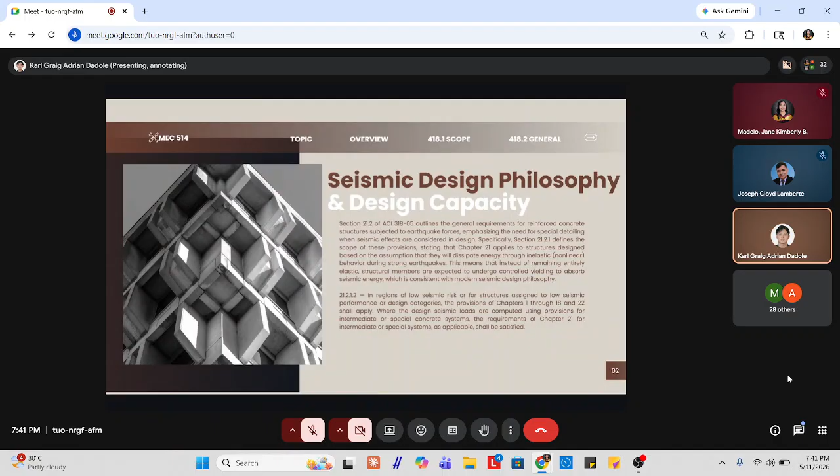In regions of moderate seismic risk, the code requires the use of more reliable lateral force resisting systems, such as intermediate or special moment frames and various types of structural walls, to ensure adequate performance under earthquake loading.

For regions with high seismic risk, the code becomes more stringent, requiring the use of special moment frames, special structural walls, and properly detailed diaphragms and trusses that comply with the detailed provisions of Chapter 21. These systems are specifically designed to provide high ductility, strength, and energy dissipation capacity.

Additionally, structural members that are not intended to resist earthquake forces must still meet certain minimum requirements to ensure that they do not fail in a brittle manner during seismic events.

And lastly, the code allows alternative systems that do not strictly follow Chapter 21. These are special provisions, as long as they provide sufficient experimental and analytical evidence that demonstrates that such a system can achieve equal or greater strength and toughness compared to conventional reinforced concrete systems designed in accordance with the code.

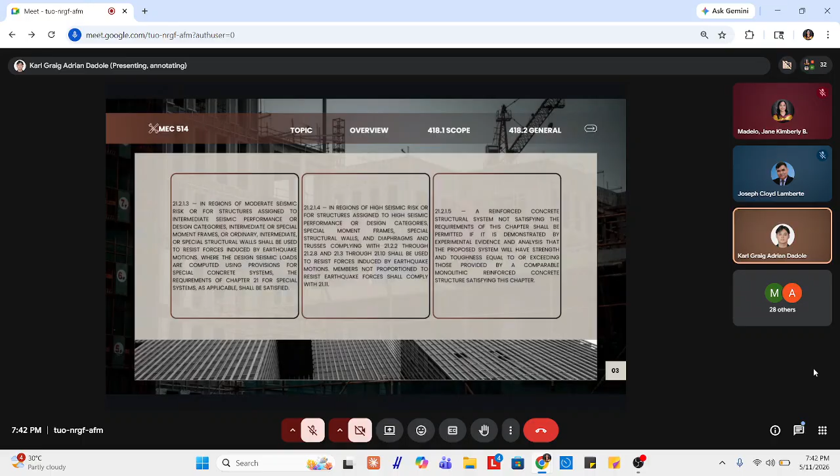For the analysis and proportioning of structural members, Section 418.2 of the Seismic Design Provisions, consistent with the philosophy of ACI 318-05 and similar codes adopted in national standards, provides detailed requirements for the analysis, proportioning, and detailing of reinforced concrete members subjected to earthquake forces. Each of these subsections emphasizes and ensures that structures behave predictably and ductile during seismic events.

For Section 418.2.2, the analysis requires that both structural and non-structural components of the building be considered, as their interaction can significantly influence the building's response under earthquake loading. This includes both linear elastic and non-linear inelastic behavior, recognizing that the real structure will undergo cracking and yielding.

Even members not intended to resist seismic forces, if they produce rigid elements, must be accounted for in the analysis if they affect overall stiffness and response. However, the code clarifies that the consequences of failure of non-seismic members need not be considered in the main seismic resistance design.

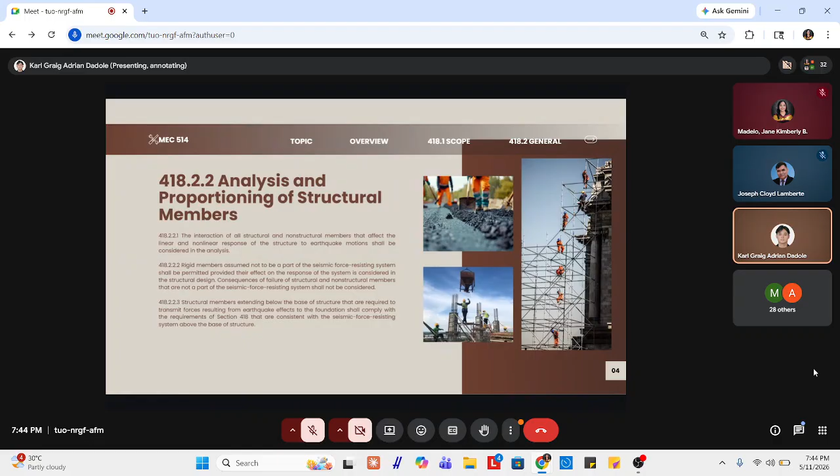Additionally, elements extending below the base, such as foundation members, must be designed consistently with the seismic systems above to ensure the proper transfer of earthquake forces into the ground.

So for earthquake resistant structures, first are the anchoring to concrete provisions, and the strength reduction factors that we need to consider in our design if we use these special seismic provisions.

For Section 418.2.3, anchoring to concrete addresses the anchorage systems that resist earthquake-induced forces. In higher seismic zones, such as Zone 2 and Zone 4, anchorage must meet stricter provisions, referencing Section 417.2.3 of our seismic design code. This is to prevent brittle failure, like pull-outs or concrete breakouts, and ensures that connections between structural and non-structural components remain intact during strong shaking.

For Section 418.2.4, strength reduction factors, this specifies that the strength reduction factors, or phi factors, used in design must comply with Section 421 on strength reduction factors. These factors account for uncertainties in material strength, construction quality, and loadings, and are especially important in seismic design to ensure a margin of safety against failure.

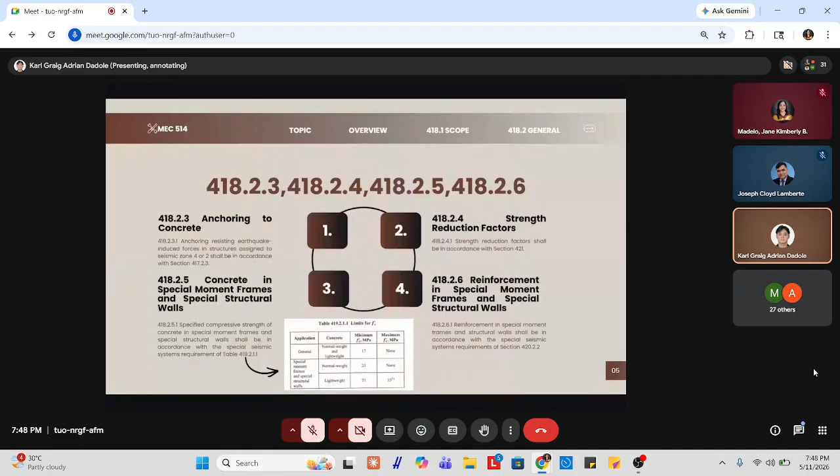For Section 418.2.7, mechanical splices in special moment frames and special structural walls. This section classifies splices into Type 1 and Type 2.

Type 1 splices meet basic strength requirements but are limited in where they can be placed. They are not allowed in regions where yielding is expected, particularly near column-beam joints, because they may not sustain large inelastic deformations. Type 2 splices, on the other hand, are stronger and capable of developing the full tensile strength of the reinforcing bar, making them suitable for use even in critical regions, except where specifically restricted. This distinction ensures that connections in high-stress zones remain reliable during earthquakes.

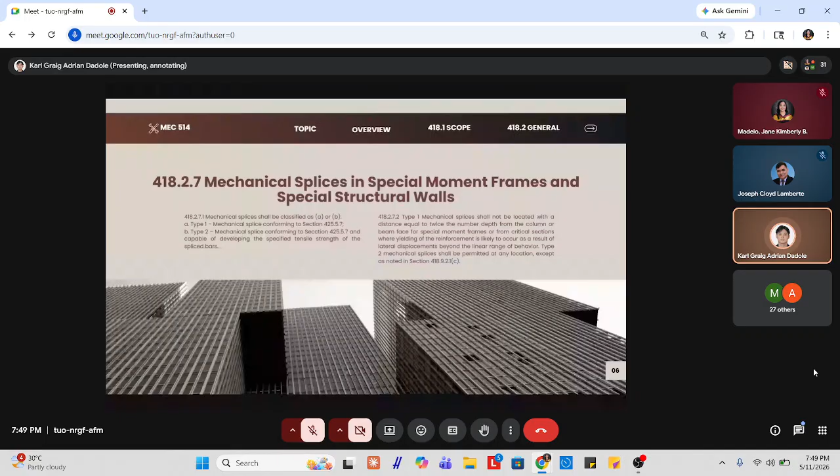For the last slide, welded splice in special moment frames and special structural walls requires that welded splices also meet strength and performance criteria, and prohibits their placement in regions where significant inelastic deformation is expected. Welding can introduce brittleness or residual stresses, so it is carefully controlled.

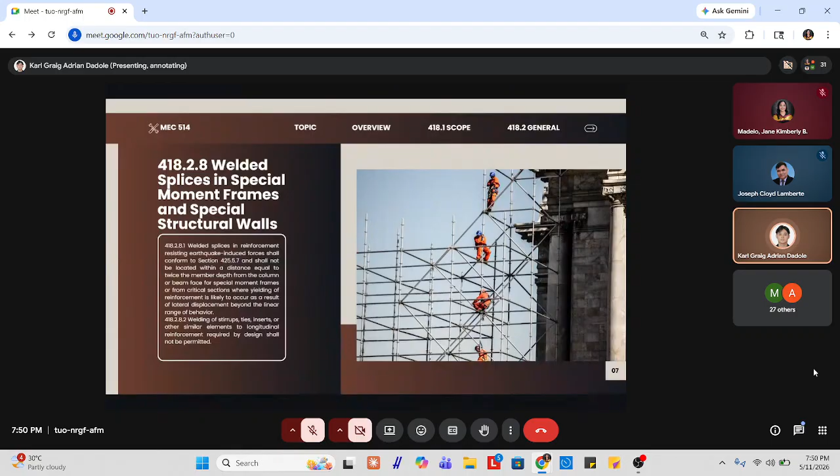Overall, these provisions collectively ensure that the reinforcement in our concrete structures is not only strong but also ductile, with careful detailing, connections, and materials that enable them to withstand earthquake forces through controlled energy dissipation rather than sudden brittle failures. That's all for my report, since this is only the introduction. More in-depth and detailed discussion will be presented later by the succeeding reporters.

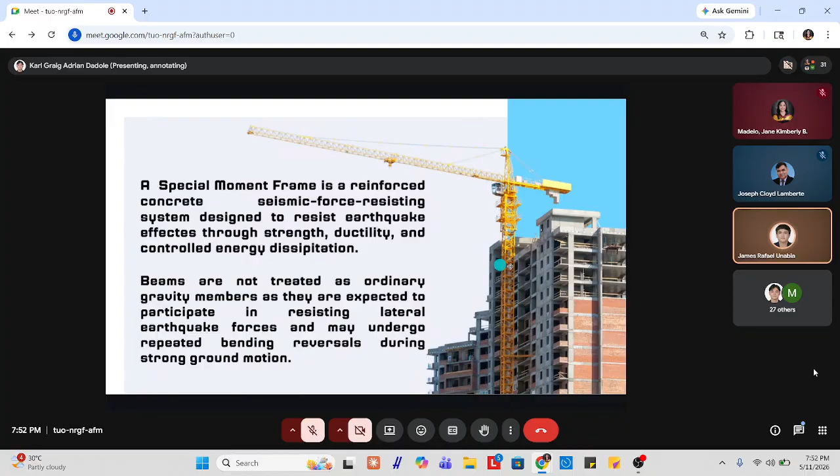Now let's discuss the beam scope, under section 418.6.1 of our NSCP 2015, which applies to beams in special moment frames that are part of the SMRF system and designed for flexure and shear. Dimensional limits, under section 418.6.2, control clear span, width-to-depth proportion, minimum width, and beam projection beyond the supporting column.

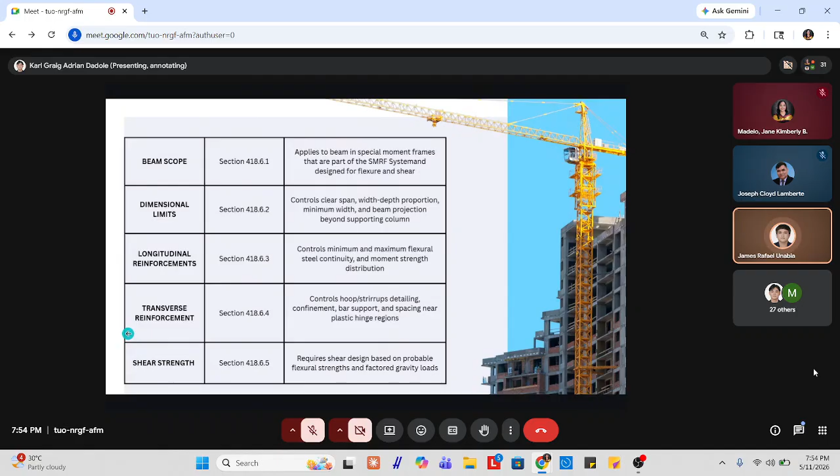Longitudinal reinforcement, under section 418.6.3, controls the minimum and maximum flexural steel, continuity, and moment strength distribution. Next is transverse reinforcement, under section 418.6.4, which controls hooks, stirrups, detailing, confinement, bar support, and spacing near plastic hinge regions. Lastly, shear strength, under section 418.6.5, requires shear design based on probable flexural strengths and factored gravity loads.

So, beams of special frames: the following requirements apply to beams of special moment frames that form part of the seismic force resisting system and are proportioned primarily to resist flexure and shear.

The limits on span length and section dimension are as follows. First, the clear span shall be at least 4 times the effective depth. Its purpose is to prevent deep beam behavior and encourage flexural action. Looking at the seismic reasoning, ductile flexural yielding is preferred over brittle shear-dominated responses.

Number two is the width-to-depth ratio shall be at least 0.3. The purpose of this is to ensure the beam is wide enough relative to its depth. For seismic reasoning, it reduces congestion and allows proper placement of bars, hooks, and concrete.

Third, the minimum width shall be 200 millimeters. This provides constructability and sufficient reinforcement space. For seismic reasoning, it supports proper confinement and prevents weak zones caused by poor concrete consolidation.

And lastly, the projection of the beam beyond the width of the supporting column on each side shall not exceed the lesser of column 2, or 0.75 of the column 1 length. So here's a figure to show on the next slide, which is this.

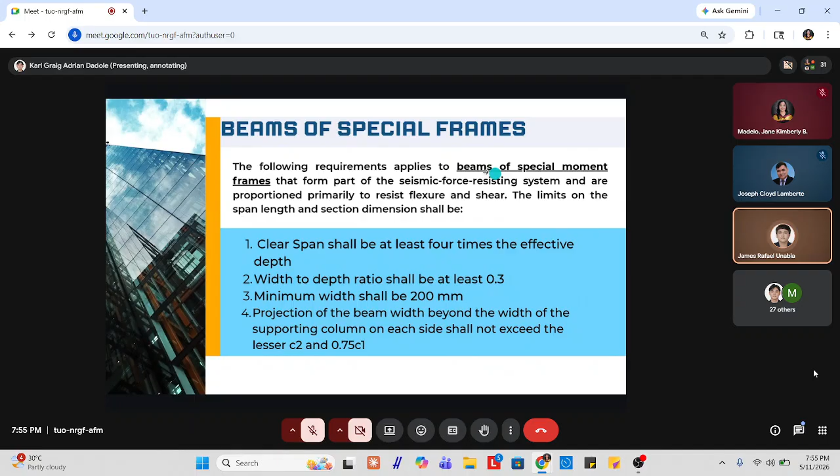This clear span limit is important because if the beam is too short relative to its depth, diagonal compression and shear effects may control the behavior.

So in special moment frames, shear failure is not desirable because it is sudden with only a small amount of warning visible in the beam. By enforcing the clear span requirement, the code supports the formation of flexural plastic hinges instead of brittle diagonal failures.

The width requirement is also related to construction quality. SMRF beams usually contain several top and bottom bars, hoops, seismic hooks, and adequate concrete cover. If the beam is too narrow, bars become congested, then concrete may not flow properly, and it becomes prone to honeycombing.

In seismic design, even small construction defects can reduce confinement and bar anchorage. So we can see in the side elevation of the beam where L should be greater than or equal to 4 times the effective depth. In section A-A, we can see that the beam width shall be greater than or equal to 250 millimeters.

Excuse me, Engineer James. Sir, 200 millimeters, sir. Yes, 200. Okay, mali pala kong figure, sir.

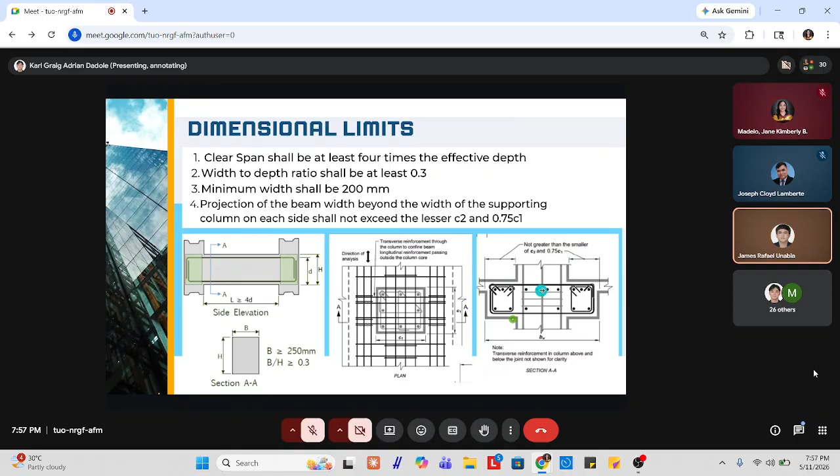So to proceed, we have the longitudinal reinforcement. The longitudinal reinforcement is the main flexural steel that we place along the length of our beam. In special moment frame, this longitudinal reinforcement must be provided both at the top and bottom faces because earthquake forces reverse direction.

The beam must therefore have enough both positive and negative moment capacity near the joints or along the span. So the minimum reinforcement to provide, both at the top and bottom faces of the beam, shall be 2 bars or satisfy these conditions.

First, the area of steel, A sub s, should be greater than or equal to the minimum, which is the square root of f'c all over 4 times fy, times the width of the beam times the effective depth. Or equal to 1.4 all over fy times beam width times the effective depth. Or our required value from our analysis, whichever of these two applies.

Then the maximum reinforcement to provide, both at the top and bottom faces of the beam, shall be less than As equal to 0.025 times the width of the beam times the effective depth. This maximum reinforcement limit is a ductility requirement because if too much steel is placed in the beam, the concrete compression zone may crush before the tension steel yields.

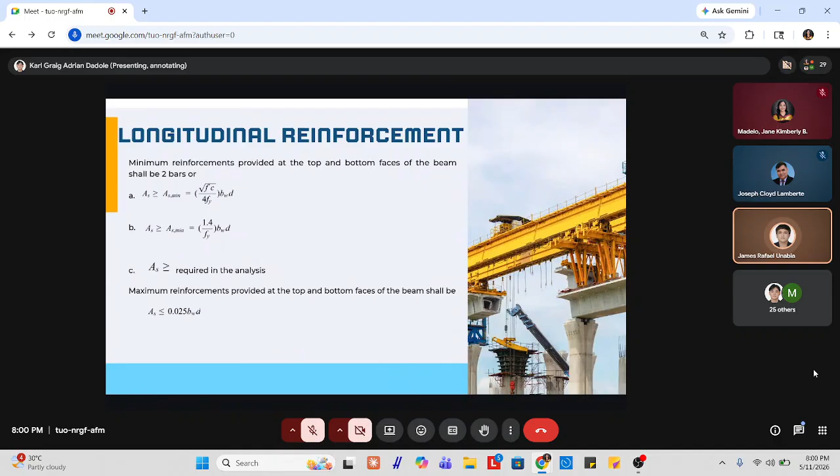This brittle failure mechanism is not acceptable in seismic design. A properly designed special moment frame beam should allow yielding of the reinforcement and controlled plastic hinge rotation.

The positive and negative moment strength requirements also prevent one-sided strength. The positive moment strength at the joint face shall be at least 1/2 the negative moment strength provided at that face of the joint or support.

Then, both the negative and positive moment strength at any section along the member length shall be at least one-fourth the maximum moment strength provided at the face of either joint.

Note that the As minimum need not be satisfied if the As supplied is one-third greater than the As required. So in our illustration, we can see here that the area of steel for the top bars should be either of the following: greater than or equal to the value required from our analysis.

Equivalent to 2 bars, as before, 1.4 over fy times Bw times the effective depth, or the square root of f'c all over 4 times fy times Bwd. And the top bars shall be less than or equal to 0.025 Bwd as the maximum requirement.

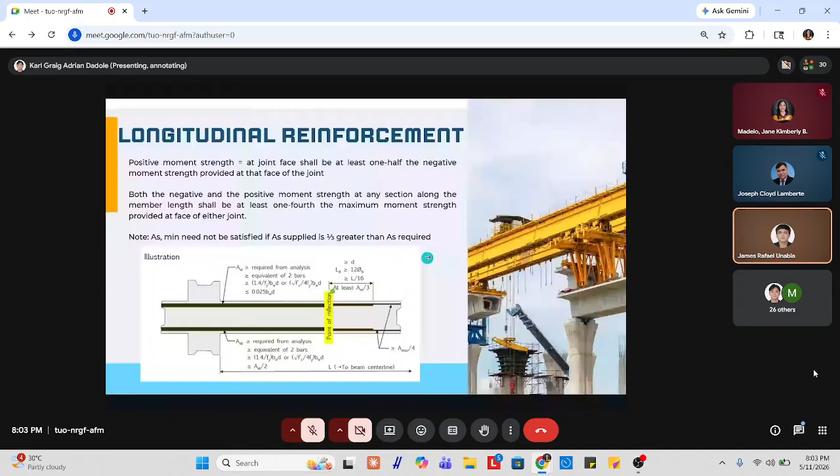Proceeding to lap splices. Splices at the longitudinal bar shall be permitted if hoop or spiral reinforcement is provided over the lap length. The following rules apply to lap splices: first, no splices are allowed within the joints.

No splices are allowed within 2 times the height, or 2h, from the face of the joint. No splices are allowed within 2h from points of flexural yielding as a result of lateral displacement, and the lap length must be provided with hoops or spiral with S equal to D over 4 or 100 millimeters.

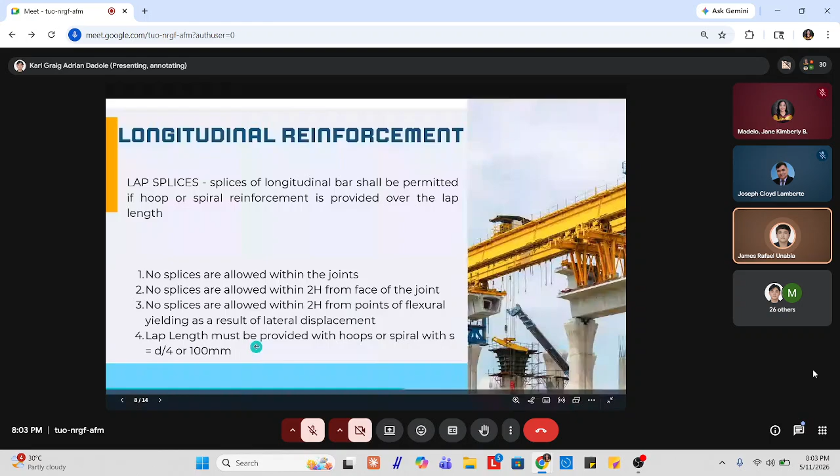Proceeding to transverse reinforcement, this includes hoops, stirrups, ties, and seismic hooks placed along the beam section. In ordinary beams, the stirrup mainly resists shear, whereas in special moment frame beams, transverse reinforcement has additional seismic function.

It confines the concrete core, restrains longitudinal bars against buckling, maintains shear strength after cracking, and supports ductile plastic hinge behavior. Beam ends near column faces are critical because plastic hinges are expected to form during strong earthquakes. In those regions, the concrete cover may crack and the longitudinal bars may yield. Without closely spaced hoops, the concrete core may lose confinement and the bars may buckle under cyclic compression, causing rapid loss of strength and stiffness.

Transverse reinforcement over the confined region shall be proportioned to resist shear, assuming VC is equal to 0 when both of the following conditions occur: first, 1/2 of V sub E should be less than or equal to the probable moment at A plus probable moment at B, all over length. And the condition that the axial load PU shall be less than or equal to 0.05 times FC prime times the gross area.

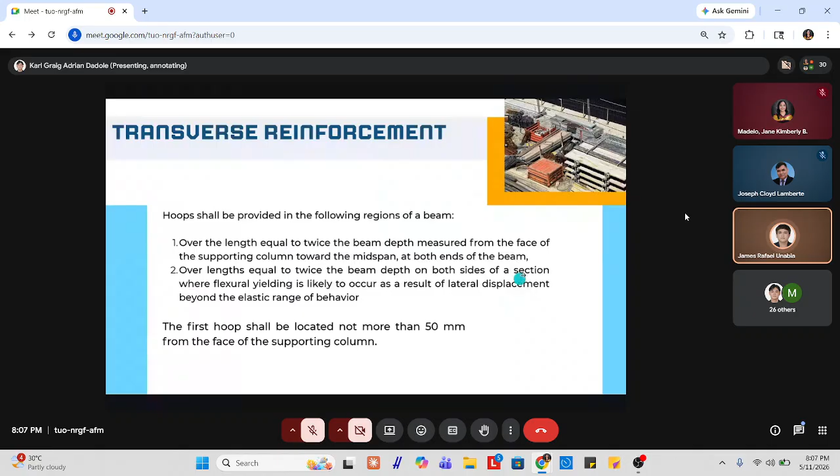The first hoop should be located not more than 50 millimeters from the face of the supporting column. After this first spacing of 50 millimeters, the subsequent spacing shall be equal to or less than 1/4 of the effective depth, 6 times the diameter of the main bar.

This should be less than or equal to 150 millimeters. Note that corner and alternate longitudinal bars shall be provided with lateral support by a tie with included angle not more than 135 degrees and no further than 150 millimeters from such laterally supported bars.

Lastly, where hoops are not required, stirrups with seismic hooks at both ends shall be spaced at a distance not more than half the effective depth throughout the length of the member. We see that S shall be less than or equal to D over 2.

And then, just using the smallest spacing among these: 1/4 of the effective depth, whose purpose is to keep hoops close enough to confine the beam core and control cracking, whereas 6 times the diameter of the main bars restrains the longitudinal bars from buckling between supports.

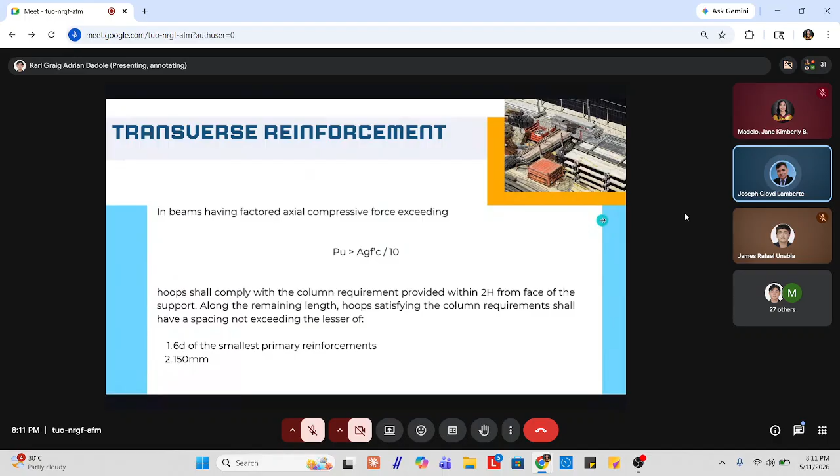Okay class, did you understand that, class? Understood? Let's go back to Engineer Unabia. You didn't cover yet, Engineer James, the requirements for shear capacity for special moment resisting frame? No? That's still on class 10.

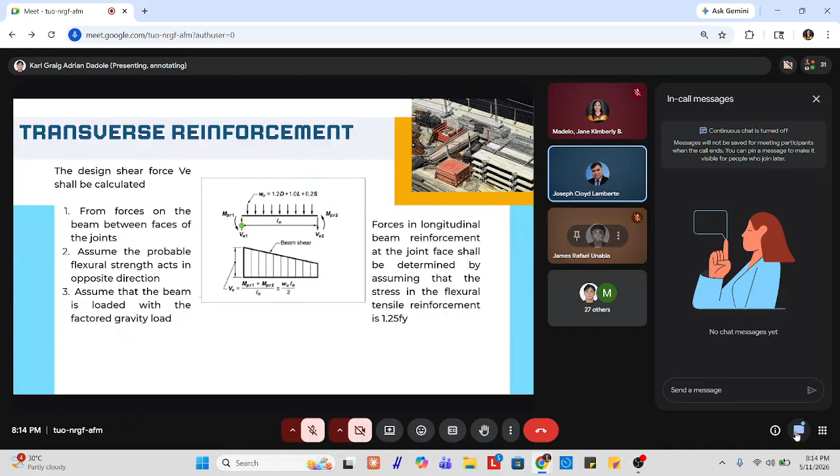Extra shear strength, as they call it. Yes, actually it's in section 418.7.6.2.1.

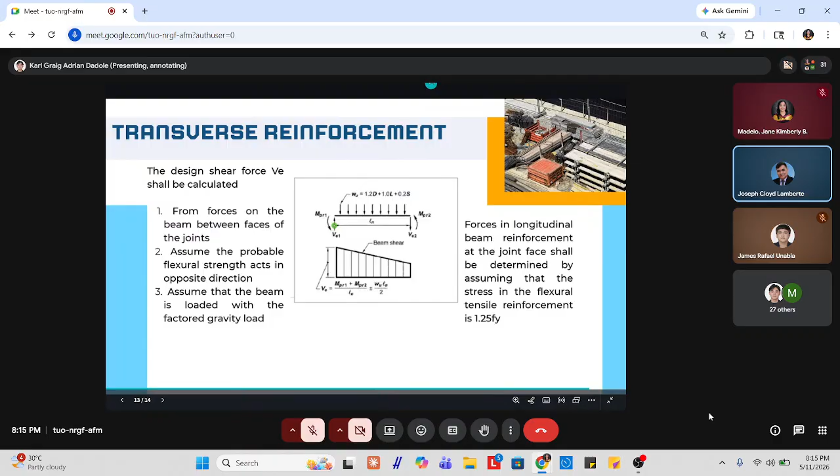I-check mo kung mo-satisfy siya ana. Kani siya is the dimensional check - kung ang imong VU is greater than this value, increase nimo ang size. So usahay kung mo-gamit kag RCDC, tingala ka nga anong sige ning pagsaka. Daghan din sila mga requirement.

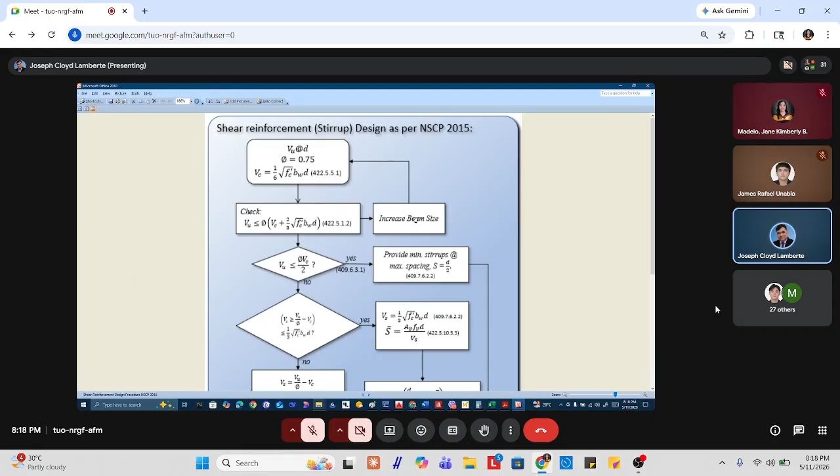If your VU dako kayo, mas dako pa sa VC plus this value, increase din ang beam size kay gamay ra imong dimension. Pero kung pasar siya diha, next siya i-check.

Kung mag-require ba siya og stirrup or dili. If your VU is less than or equal to the reduced VC over 2, dili na kailangan mag-provide og stirrup, but the code requires us to provide minimum stirrups at maximum spacing, D over 2. Pero kung dili siya mo-satisfy, kinahanglan siya og stirrup, so kuhaon nato ang shear sa stirrup, equal to VU over reduction factor minus VC.

So naka-value ang VC diha. Pero sa seismic provision of the code, ingon siya nga himuon daw equal to 0 ang VC - transverse reinforcement over the length LO given in section 418 shall be designed to resist shear assuming VC is equal to 0.

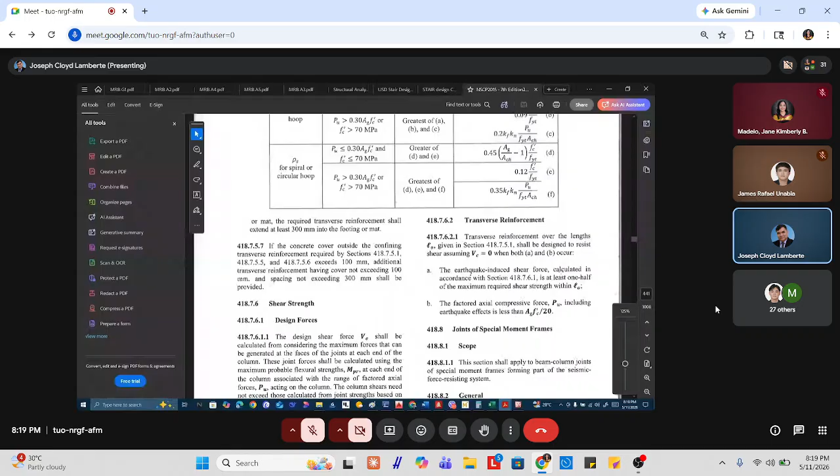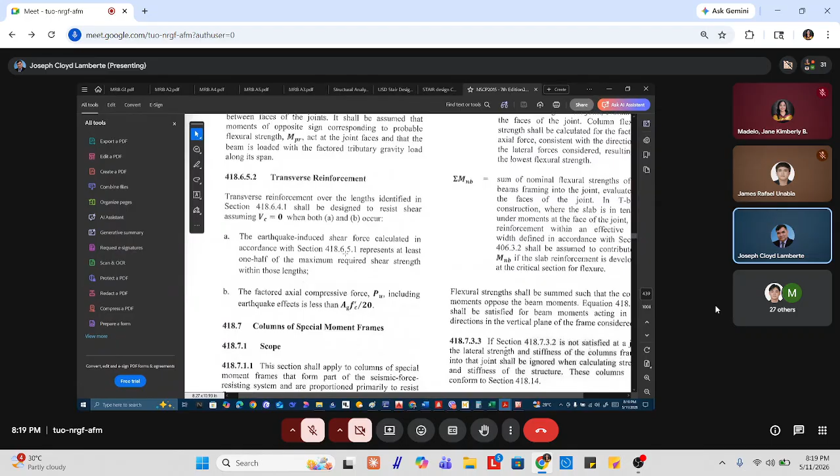Of the revised code, as I earlier identified, transverse reinforcement over the length in section 418.6.4.1 shall be designed to resist shear assuming VC is equal to 0. So this is the reinforcement requirement for shear strength - minimum na siya.

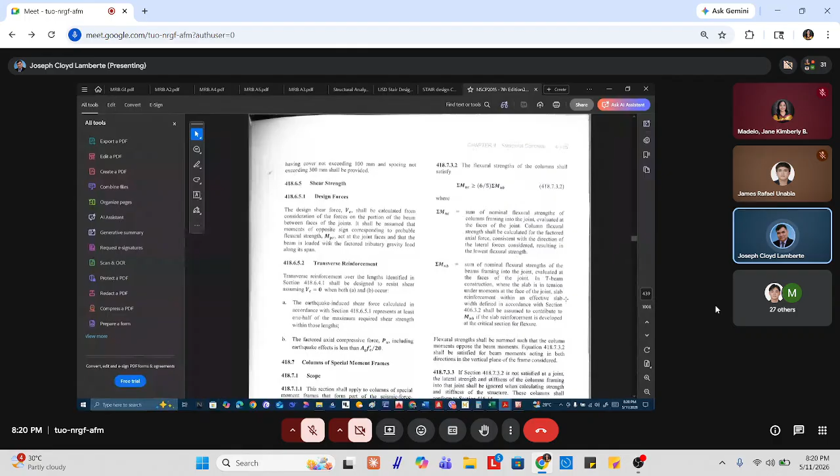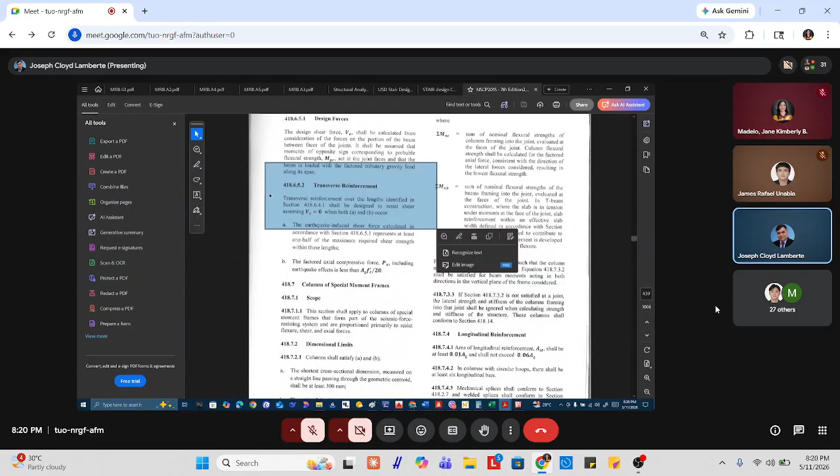Dili na nato i-consider ang VC kung sa ordinary beam pa, pero i-consider nato siya kung sa special moment frame, tungod kay kung mag-bali-bali ang imong earthquake, ang top and bottom reinforcement at either support will experience both compression and tension alternately. So kung ang bottom bar mo ay may compression, ang top bar may tension. Pagbalik sa linog, ang top bar mo nasa compression, ang bottom bar nasa tension. So once mubalik na siya karon, wala na itawag og shear capacity sa concrete, wala na siya kung mubalik. So we might as well consider it equal to zero na lang.

So imong shear strength sa stirrup is equal to VU over reduction factor na lang, wala na yung minus VC kay zero naman ang VC diya. Nakuha ninyo, class?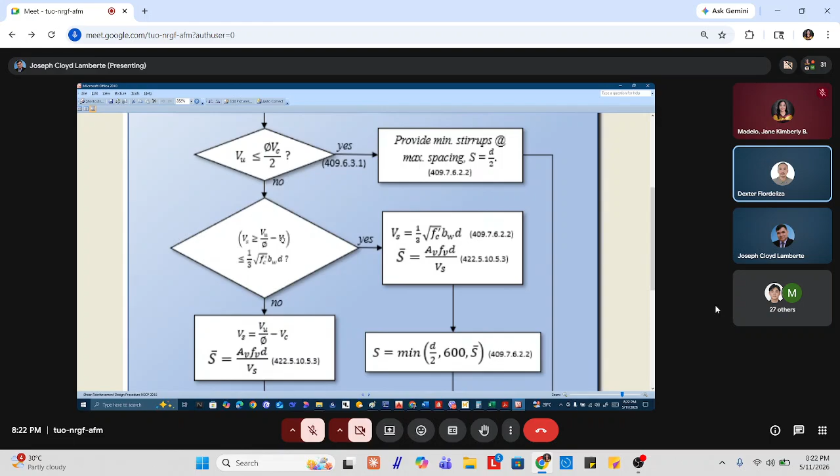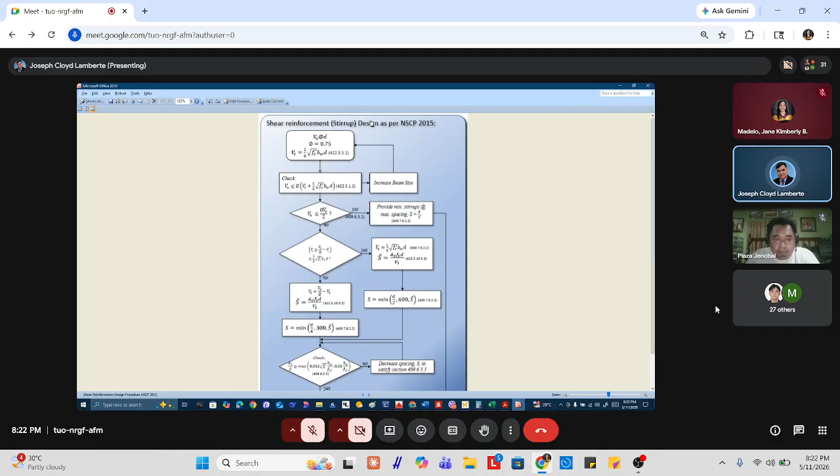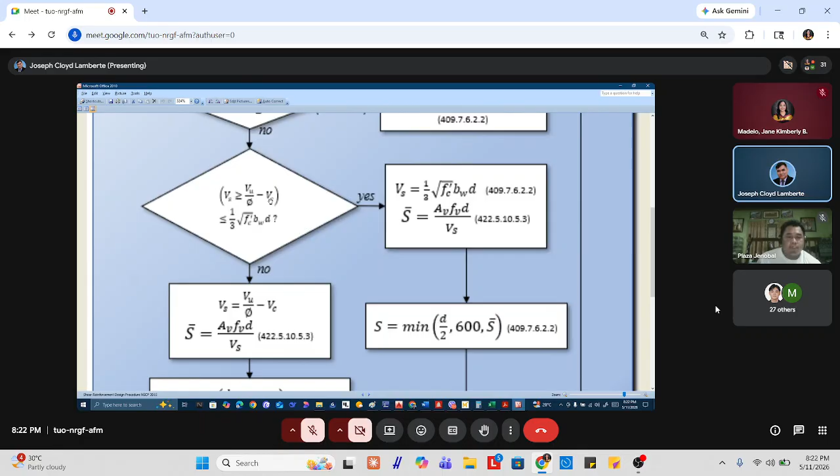Yes sir. Okay, maghimo kog example para sa kaning special moment frame - shear reinforcement stirrup design as per NSCP 2015, pero slight difference sa seismic provision for section 418, and considering VC zero siya dapat.

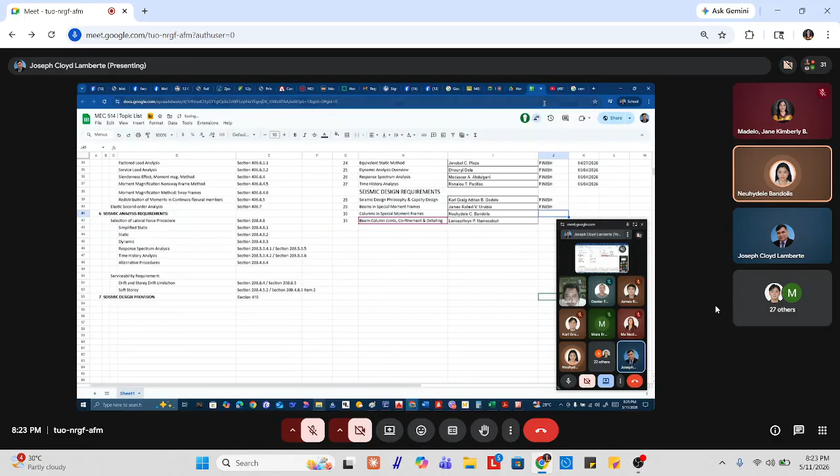Good evening, sir. Good evening, everyone. I am Neuhydele Bandolis, and I will be presenting columns of special moment frames based on NSCP 2015 Section 418.7. Next slide please, thank you.

According to NSCP 2015 418.7.1, this section covers columns and special moment frames which are part of the seismic force resisting system. This means these columns play a critical role during earthquakes. They are designed to resist three main types of forces: flexure or bending, shear or lateral forces, and axial forces or vertical loads. In simple terms, these sections tell us how to design columns so that they are strong enough to carry loads while also being ductile enough to perform safely during seismic events.

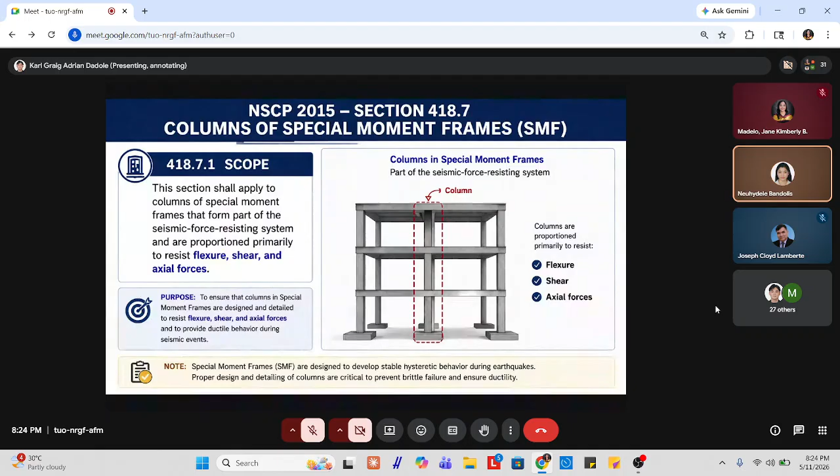Now that we understand the scope of Section 418.7 and what type of column it applies to, we can move on to the first specific requirements, the dimensional limits of columns and special moment frames.

Under NSCP 2015, Section 418.7.2, columns of special moment frames must satisfy two main dimensional requirements. First is the minimum dimension: the shortest cross-sectional dimension of the column measured through the geometric centroid must be at least 250 millimeters. Second is the aspect ratio: the ratio of the shortest dimension to the longer or perpendicular dimension must be at least 0.4. In simple terms, this prevents the column from being too narrow or too slender in one direction.

So, for example, if a rectangular column has a shortest side of 300 millimeters and the longest side is 500 millimeters, the aspect ratio is 300 divided by 500, which is 0.6. Since 0.6 is greater than 0.4, the column complies with Section 418.7.2. Overall, these dimensional limits help ensure that columns have adequate strength, ductility, and seismic performance.

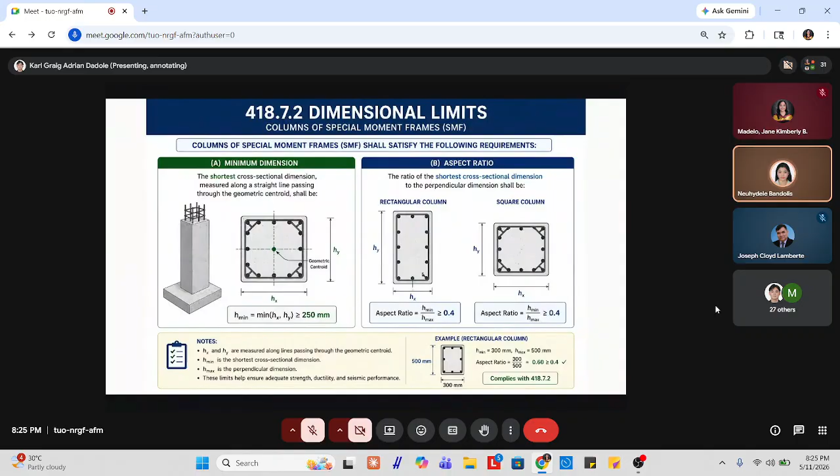After checking the size and proportion requirements of the column, the next important requirement is its strength. So now let's proceed to Section 418.7.3, minimum flexural strength of columns.

Under NSCP 2015 Section 418.7.3, columns must satisfy the minimum flexural strength requirement. Flexural strength refers to the ability of a member to resist bending. In this section, the code requires that the total flexural strength of the column framing into a joint must be at least 20% greater than the total flexural strength of the beams framing into the same joint. This is shown by the equation: the sum of column moment strength must be greater than or equal to 6/5 of the sum of the beam moment strength. In simple terms, column strength must be at least 1.2 times the beam strength.

This requirement follows the strong column weak beam concept. The purpose is to make sure that during an earthquake, inelastic action or damage happens first in the beam rather than in the columns. This is important because if columns fail first, as we all know, the entire story may collapse, leading to a dangerous failure mechanism. But if the beam yields first, the structure can absorb energy and deform in a more controlled and ductile way. Overall, this requirement helps prevent sudden collapse and improve the seismic performance of the structure.

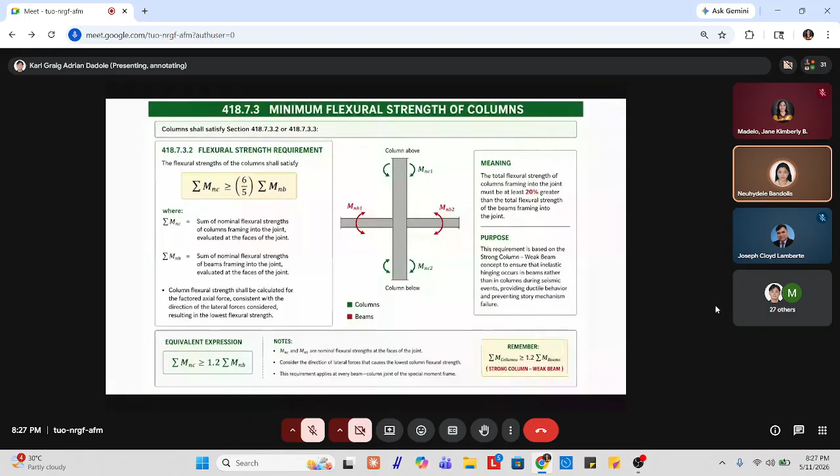After checking that the columns have enough flexural strength, we now move on to the reinforcement that helps the column resist bending and axial load. This brings us to Section 418.7.4, longitudinal reinforcement.

Under NSCP 2015 Section 418.7.4, the longitudinal reinforcement in columns of special moment frames must comply with Sections 418.7.4.1 to 418.7.4.3. Longitudinal reinforcement refers to the vertical steel bars placed along the length of the column.

These bars provide the main resistance against flexure or bending and also help the column carry axial forces or vertical loads. For the amount of reinforcement, the area of longitudinal bars represented by A sub ST must not be less than 1% and must not be greater than 6% of the gross concrete area represented by A sub G. In simple terms, there should be enough steel to provide strength, but not too much that it causes congestion and makes proper concrete placement difficult.

For circular columns, the code also requires at least 6 longitudinal bars when circular hoops are used.

Another important part of this section is about splices, or the connection of reinforcing bars. For mechanical splices, they must conform to the code requirement already discussed under Section 418.2.7, which covers mechanical splices in special moment frames and special structural walls. For lap splices, these are only permitted within the center half of the column length. A lap splice is a way of connecting two reinforcing bars by overlapping them for a required length so that they act like one continuous bar.

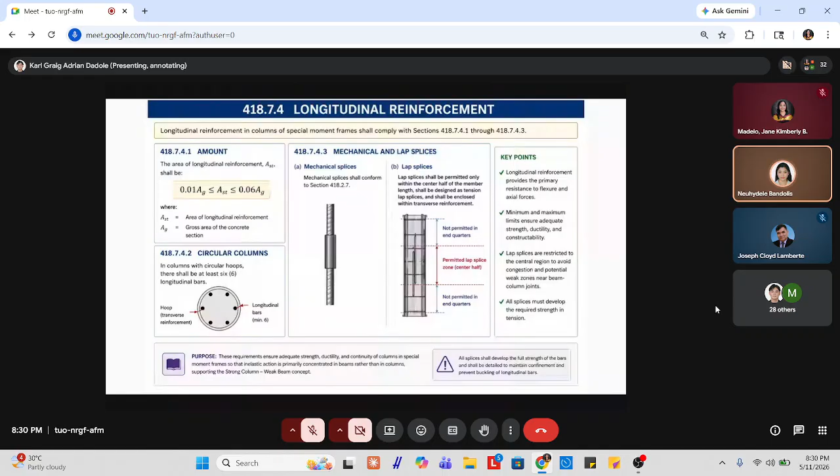The bars may be pulled, so the splice must be long enough and properly confined to prevent slipping or separation. Overall, these requirements ensure that the column has enough strength, ductility, and continuity while preventing weak zones near the joints.

Next slide, please. After discussing the longitudinal reinforcement, or vertical steel bars, on the column, we now move to the reinforcement that wraps around them. This is called the transverse reinforcement.

Under NSCP 2015, Section 418.7.5, transverse reinforcement in columns of special moment frames must comply with Sections 418.7.5.1 through 418.7.5.6. Transverse reinforcement includes ties, hoops, spirals, and cross ties placed around the longitudinal bars.

Its main purpose is to confine the concrete core, improve shear strength, prevent buckling of longitudinal bars, and increase the ductility of the column during earthquakes.

When we say shear, it is the internal force that tries to make one part of the column slide or cut against another part. As a reminder, during earthquakes the building moves sideways, so the column experiences both bending and shear.

We need to improve the shear strength because shear failure is usually sudden and brittle, often forming diagonal cracks. Another important function is to prevent buckling.

Buckling happens when the vertical reinforcing bars bend sideways or lose their straight shape due to compression. Without proper ties or hoops, the longitudinal bars may buckle outward, causing the column to lose strength and stability.

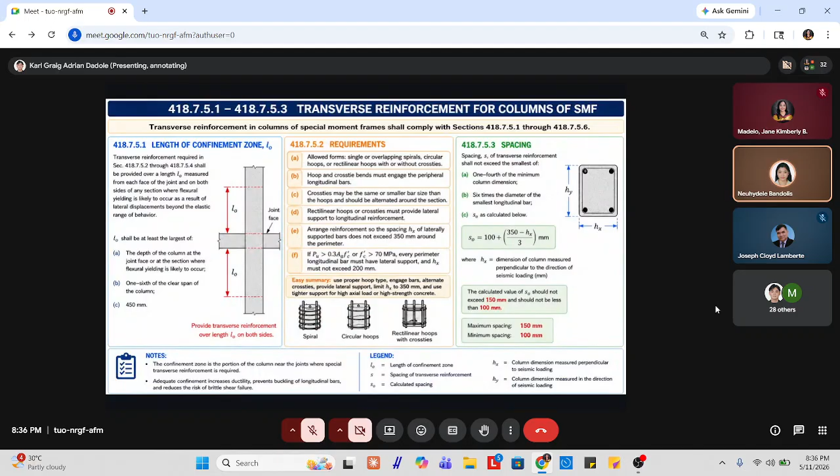After discussing the length, arrangement, and spacing of transverse reinforcement, we now move to table 418.7.5.4. This table gives the minimum required amount of transverse reinforcement for columns of special moment frames. At first, the table may look complicated because it contains several expressions, but its purpose is simple: it helps determine how much transverse steel is needed to properly confine the column.

So when we say amounts of transverse reinforcement, it does not directly mean the number of ties or hoops. Instead, it refers to the required steel area or reinforcement ratio. For rectilinear hoops or rectangular ties and cross ties, the table uses A sub SH over S sub B sub C.

This represents the required transverse reinforcement ratio for rectilinear hoops. From this value, the designer can determine A sub SH, which is the required area of transverse reinforcement within a spacing S. So in simple terms, it answers the question, how much tie or hoop steel area do we need within this spacing? For spiral or circular hoops, the table uses rho sub S, which represents the required volumetric ratio of transverse reinforcement.

So it answers the question, how much spiral or circular hoop reinforcement is needed to confine the column. The table also depends on important conditions. First is the factored axial compressive load represented by P sub U. Second is the specified compressive strength of concrete represented by F prime sub C. If the column has a higher axial load, or if the concrete strength is greater than 70 MPa, the table requires additional checking and may require more confinement reinforcement.

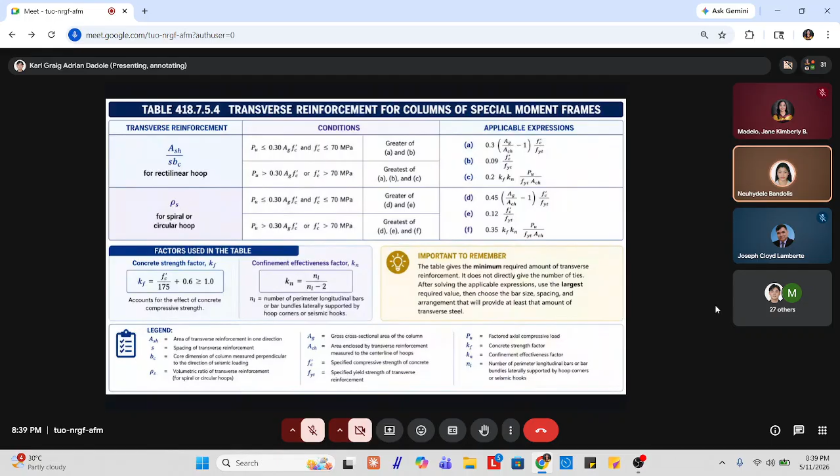After determining the required amount of transverse reinforcement, we now move to the additional transverse reinforcement requirements under Section 418.7.5.5 to 418.7.5.7.

First, under Section 418.7.5.5, even beyond the confinement length or L sub 0, the column must still contain spiral or hoop reinforcement. This means that the transverse reinforcement should not stop right after the critical confinement zone. It must continue along the column to maintain confinement and support.

The spacing S must not exceed the smaller of 6 times the diameter of the smallest longitudinal bar, or 150 millimeters, unless a larger amount of transverse reinforcement is required by another code provision. So the main idea of this section is that reinforcement continues even outside the critical confinement zone.

Next, under 418.7.5.6, this applies to columns supporting reactions from discontinued stiff members such as walls. A discontinued stiff member is a stiff structural element that does not continue down to the lower level. So the supporting column must resist and transfer the force coming from that discontinuity.

For part A, the code requires that the transverse reinforcement from sections 418.7.5.2 to 418.7.5.4 be provided over the full column height below the discontinuity.

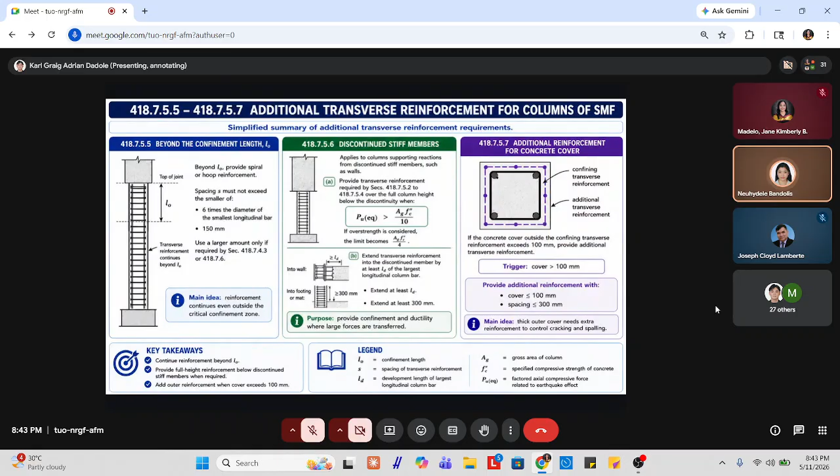Overall, this section ensures that the transverse reinforcement continues where needed, especially beyond the confinement zone, below discontinuous stiff members, and in areas with thick concrete cover. This helps improve confinement, ductility, and overall seismic performance of the column. Next slide, please.

After discussing the transverse reinforcement requirements, we now move to section 418.7.6, shear strength. This section focuses on how special moment frame columns are designed to resist shear forces during earthquakes. Shear is the internal force that tries to make one part of the column slide or cut against another part. During an earthquake, the frame moves sideways, so the column experiences both bending and shear.

The purpose of this section is to prevent brittle shear failure, because unlike bending failure, shear failure can happen suddenly and may lead to serious damage or collapse.

Under section 418.7.6.1, the design shear force, represented by VE, is calculated from the maximum forces that can be generated at the faces of the joint at each end of the column.

These forces are based on the maximum probable flexural strength, represented by MPR, at the top and bottom ends of the column. In simple terms, we do not design the column shear only from ordinary analysis forces. Instead, we consider the maximum probable bending strength that the column can develop during earthquake loading.

So the formula shown on the slide is VE equals MPR top plus MPR bottom over Ln, where MPR top and MPR bottom are the maximum probable flexural strength at the top and bottom ends of the column, and Ln is the clear height of the column between the faces of the joints.

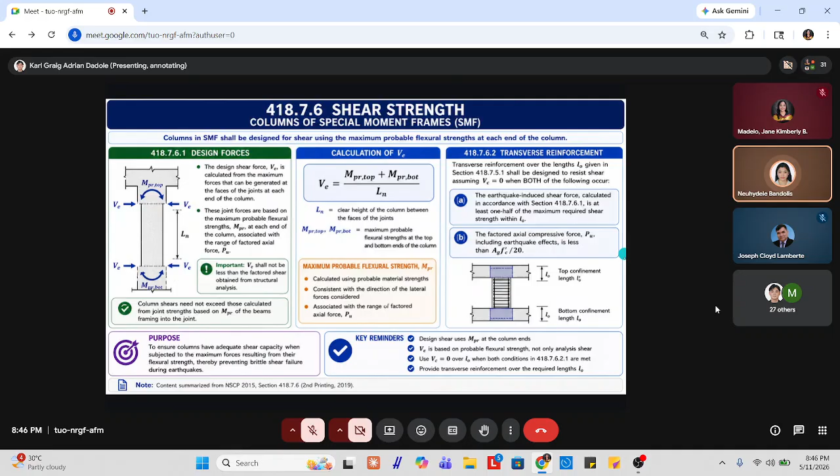Your VC is not considered anymore. The shear capacity of your column, of your concrete, is not considered. It is equated to zero, right?

Hello, good evening everyone. I will discuss the beam column joints, confinement, and detailing, based on the provisions of NSCP 2015. Next slide.

First, what is a beam column joint? A beam column joint is the region where the beams and columns intersect in a structural frame. This area is very important because it transfers the forces between structural members and greatly affects the overall behavior of the structure. If the joint fails, the structure will collapse.

There are different types of beam column joints: interior, exterior, or corner, with some special cases. For interior joints, all four faces are connected to beams. For exterior joints, only three faces are connected to beams. For corner joints, only two faces are connected to beams. The same applies to roof beams.

In our actual structures, especially reinforced concrete buildings, beam column joints are considered critical zones during earthquakes because they experience high stress concentration. If the joint fails, it may lead to structural collapse.

Why do we focus on beam column joints during earthquakes? Earthquakes produce cyclic lateral loads that repeatedly push and pull the structure, and these forces are concentrated at the joints. Because of this, the joints must transfer shear and moment forces properly and maintain integrity during deformation. A well-designed joint ensures ductility, strength, and energy dissipation, which are essential for seismic performance and life safety. Next slide please.

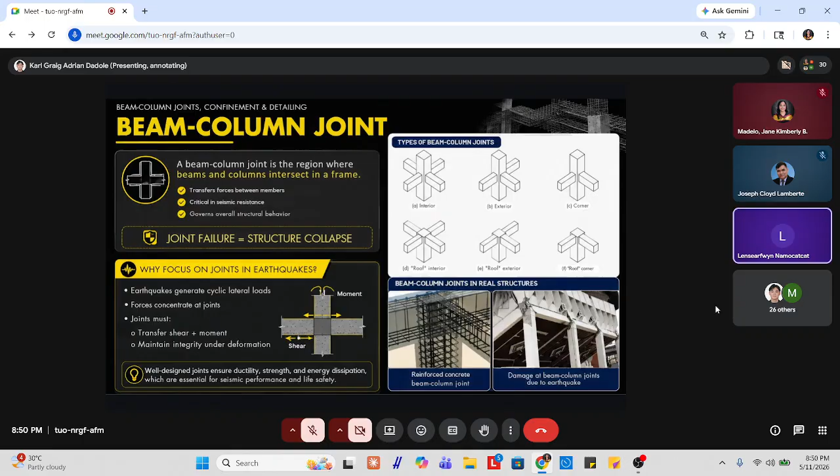One of the most important principles in seismic design is the strong column weak beam concept. The beam was already discussed in our previous report, as well as the column, based on seismic resisting frames. Now we focus on the joints.

What is strong column weak beam? This means that during a strong earthquake, the beam should yield first before the columns. The reason is that beam failure is more ductile and safer, while column failure can lead to sudden collapse of the entire structure. The column must remain stronger than the beam to maintain overall structural stability. This design approach helps the structure absorb earthquake energy while preventing catastrophic failure.

As you can see in our graph of force versus displacement, the strong column behaves linearly, while the weak beam shows a curve. This graph depicts that the column should still be able to carry a large force as it is displaced, considering nominal moments at the joint center.

If we take a section at our joint, we have the moment in the column and in the beam continuing, based on the summation of forces. The flexural strength of the columns must satisfy this equation, as discussed by the previous reporter: the nominal moment of the column must be greater than or equal to 1.2, or the figure shown, 6/5, times the summation of nominal moments of the girders or beams.

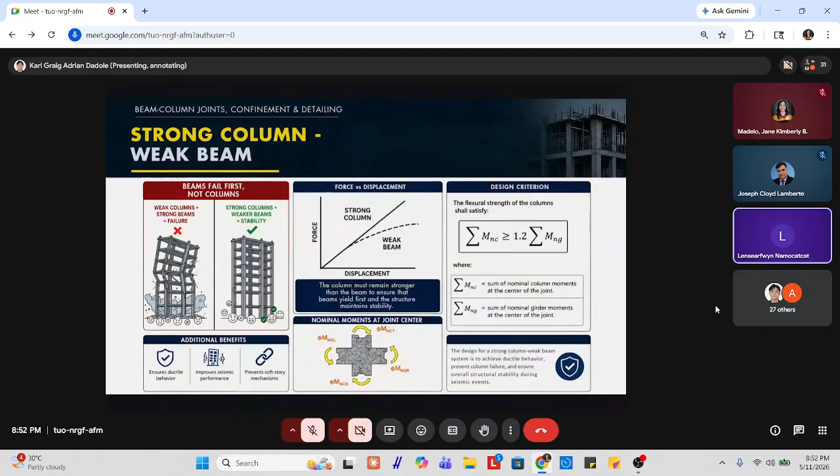According to 418.8.2.1, forces in longitudinal beam reinforcement at joint faces shall be calculated assuming that the stress in the flexure tensile reinforcement is 1.25 Fy. So this is our strong column weak beam concept connected to our joint special moment frames, which is 418.8. So instead of our traditional calculation for tension in steel, where T equals As times Fy, we now have a multiplier of 1.25. So we increase the strength by 25%.

And according to 418.8.2.3, where longitudinal beam reinforcement extends through a beam column joint, the column dimension parallel to the beam reinforcement shall be at least 20 times the diameter of the largest longitudinal beam bar for normal weight concrete, or 26 times the diameter of the largest longitudinal bar for lightweight concrete. To simplify, our column width should be greater than or equal to 20 dB, where dB is shown on the right side in the joint detail, marked in red, representing our longitudinal beam. So the largest diameter is multiplied by 20 for normal weight concrete, or 26 dB for lightweight concrete.

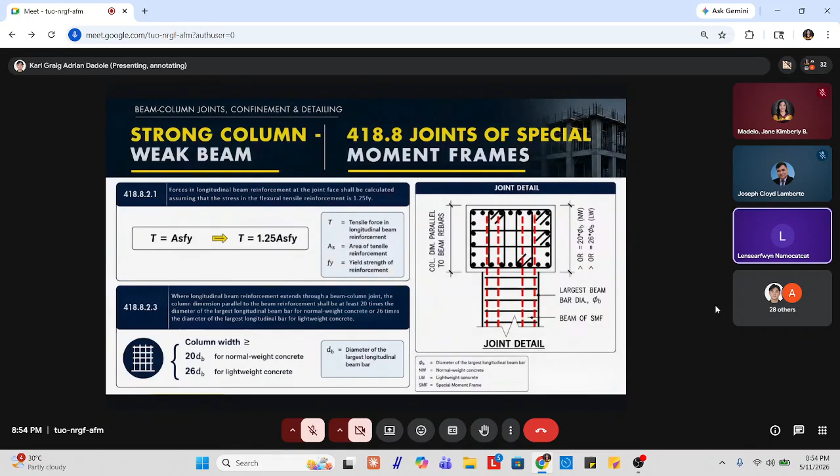According to 418.8.2.4 in our NCP, depth H of the joint shall not be less than 1/2 of depth H of any beam framing into the joint and generating joint shear as part of the seismic force resisting system. To summarize, our joint depth must be greater than or equal to 1/2 of our beam depth. What is being specified here as joint depth is parallel to the longitudinal beam. In the section shown on the right, the joint depth is equal to h. So that is what joint depth means here, and it must be at least 1/2 of the beam depth.

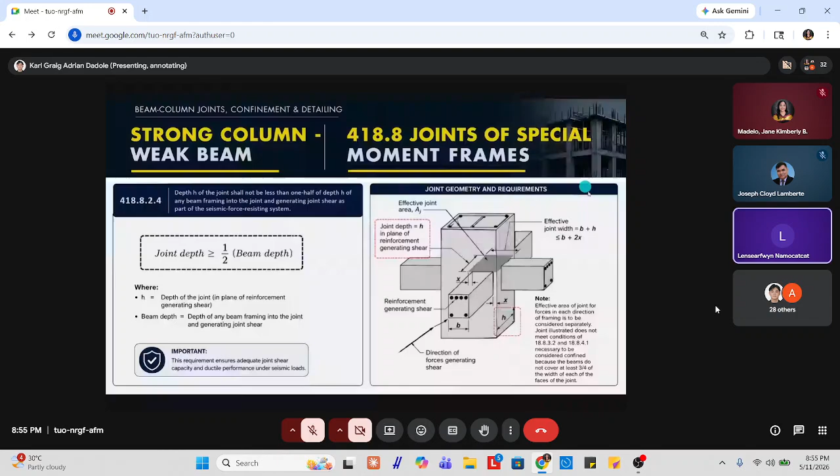According to 418.8.3.1, we now discuss transverse reinforcement. Joint transverse reinforcement shall satisfy section 418.7.5.2, which was already discussed earlier for columns regarding transverse reinforcement detailing requirements; 418.7.5.3 on the spacing of transverse reinforcement; 418.7.5.4 on the amount of transverse reinforcement; and 418.7.5.7 on additional cover and spacing requirements for sections more than 100, except as permitted in section 418.8.3.2.

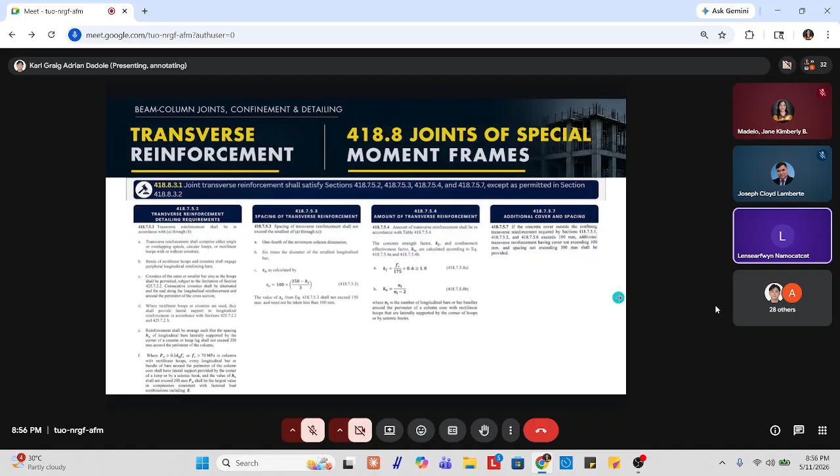Section 418.8.3.2 states that where beams frame into all four sides of the joint and where each beam width is at least 3/4 the column width, the amount of reinforcement required by section 418.7.5.4 shall be permitted to be reduced by 1/2, and the spacing required by section 418.7.5.3 shall be permitted to be increased to 150 mm within the overall depth h of the shallowest framing beam. Basically, the amount of confining reinforcement may be reduced and the spacing may be increased if beams of adequate dimension frame into all four sides, at least 3/4 the beam column width. Let's go back to this section, 418.8.3.2.

Let's summarize into conditions. Our condition is that beams must be framed into all four sides of the joint - this applies when four beams are framed in, as shown earlier. Each beam width must be at least 3/4 of the column width, meaning it must be greater than or equal to, not less than. Based on the figure, the width of the beam should indeed be smaller than the column.

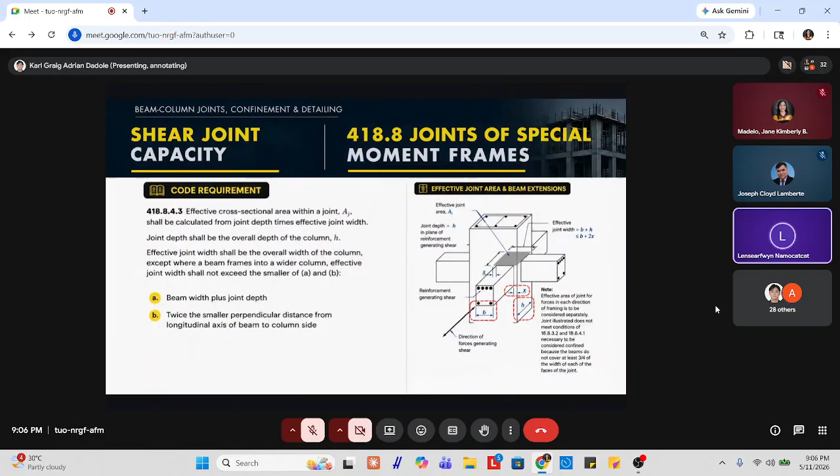So let's move on to development length of reinforcement. Under section 418.8.2.2, beam longitudinal reinforcement terminated in a column shall extend to the far face of the confined column core and shall be developed in tension in accordance with section 418.8.5, the development length of bars in tension, and in compression in accordance with section 425.4.9, the development of deformed bars and deformed wires in compression.

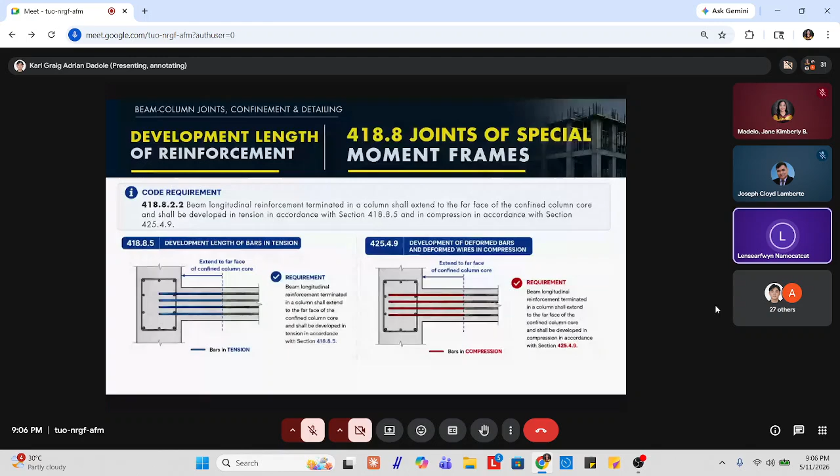Now let's discuss development of bars in tension. Under 418.8.5.1, for bar sizes 10 mm through 36 mm diameter terminating in a standard hook, LDH shall be calculated by equation 418.8.5.1, but LDH shall be at least the larger of 8 dB and 150 mm for normal weight concrete, and at least the larger of 10 dB and 190 mm for lightweight concrete.

Based on this equation 418.8.5.1, LDH is equal to Fy dB over 5.4 lambda square root of FC prime. Recall that these standard values for LDH can also be found in section 425 for tension bars. The values like lambda and psi that we used earlier are the same ones defined there.

Under joint in special moment frame, this is the LDH we consider. Our lambda is 1 for normal weight concrete and 0.75 for lightweight concrete. Then there's a minimum requirement. Overall, for normal weight concrete, our LDH must be the largest value between our equation result and the comparison to 8 dB and 150 mm, whichever is greater. For lightweight concrete, we compare our equation result to 10 dB and 190 mm.

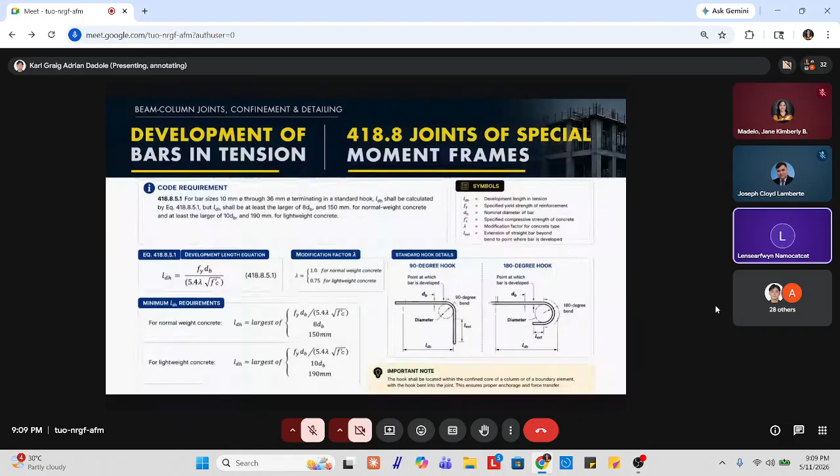The embedment length of a bar with a standard hook is the distance parallel to the bar, from the critical section - the section where the bar is to be developed - to a tangent drawn to the outside edge of the hook. This leads to the L extension. We base the standard L extension on table 425.3.1 in our NSCP.

According to 418.8.5.2, for headed deformed bars satisfying section 420.2.1.6, development in tension shall be in accordance with section 425.4.4, except clear spacing between bars shall be permitted to be at least 3 db or greater. This is what we discussed earlier about headed bars - the same image and development we showed, where the permitted spacing is 3 db or greater.

To avoid congestion, based on what I read in ACI, NSCP, or SCI, it is desirable to stagger the headed deformed bars when developing them. For section 420.2.1.6, the details of headed bars can be found there, and they must conform to ASTM A970M. For further reading, I introduced annex A1 - if you want to study headed bars more thoroughly, you can find it there.

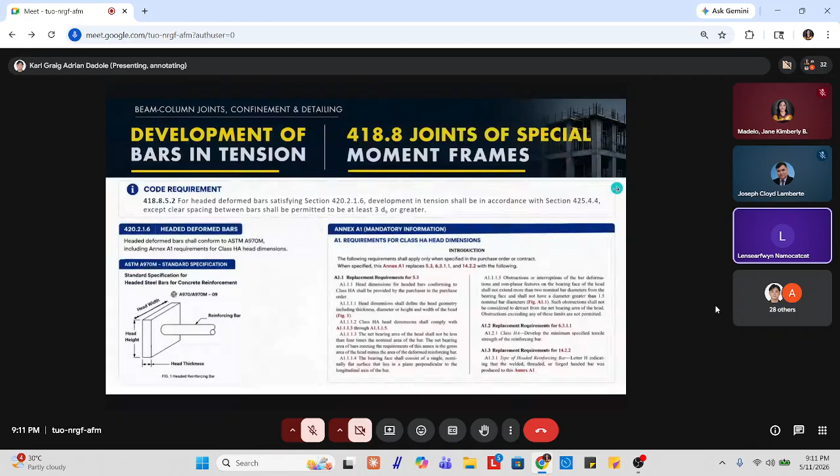For section 418.8.5.3, for bar sizes 10 mm to 36 mm diameter, LD, the development length in tension for a straight bar, shall be at least the larger of A and B: 2.5 times the length in accordance with section 418.8.5.1 if the depth of concrete cast beneath the bar does not exceed 300 mm, and for B, we multiply by 3.25.

So in summary, our LD is 2.5 times our LDH if the depth of the concrete cast is less than 300 mm, and the multiplier is 3.25 if the concrete cast depth is greater than 300 mm.

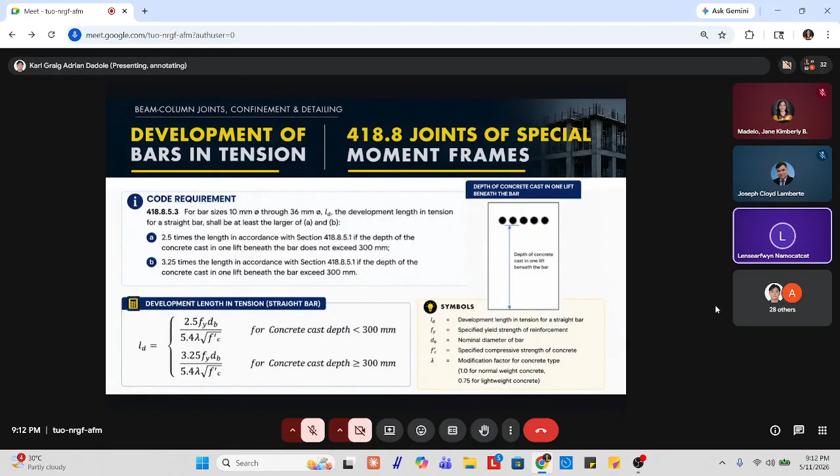According to section 418.8.5.4, for straight bars terminated at a joint shall pass through the confined core of a column or a boundary element. Any portion of LD not within the confined core shall be increased by a factor of 1.6.

This is called length LDM, the required development length if bar is not entirely embedded in confined concrete. It equals 1.6 times LD minus LDC, where LDC is the length of bar embedded in confined concrete, plus LDC. If we distribute this, adding negative 1.6 LDC plus LDC, LDM equals 1.6 LD minus 0.6 LDC.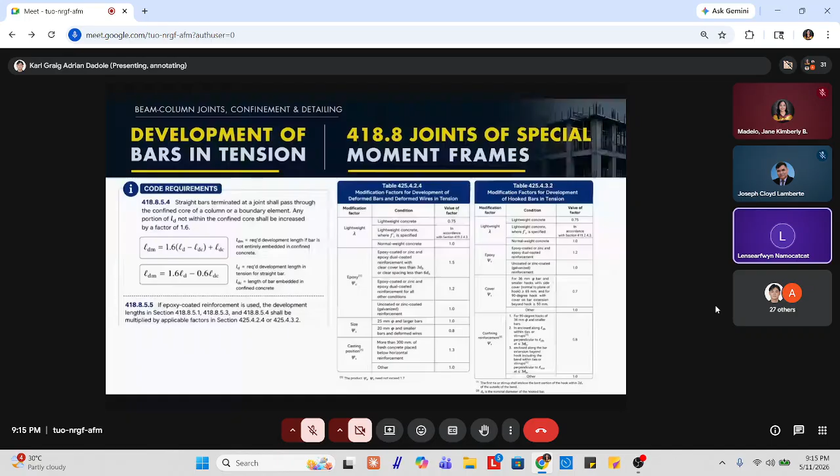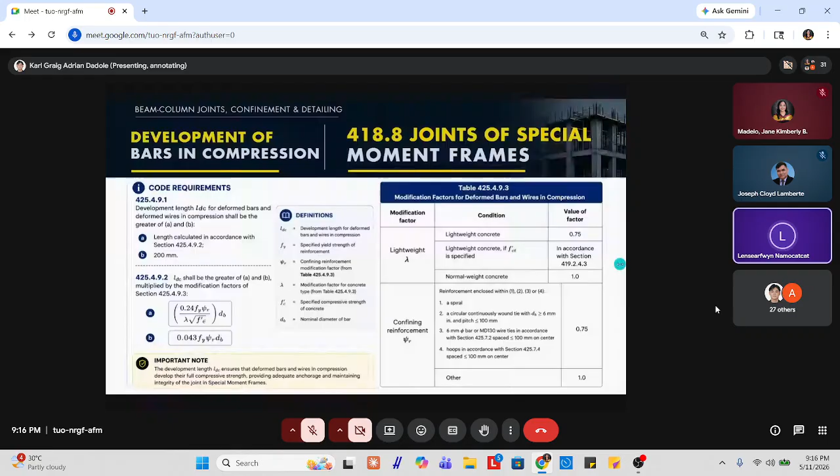This is table 425.4.9.3 for the value of lambda for lightweight concrete - normal concrete is 1.0, lightweight is 0.75, and for confining reinforcement the psi r value is 0.75 or 1.0. That's all for my report.